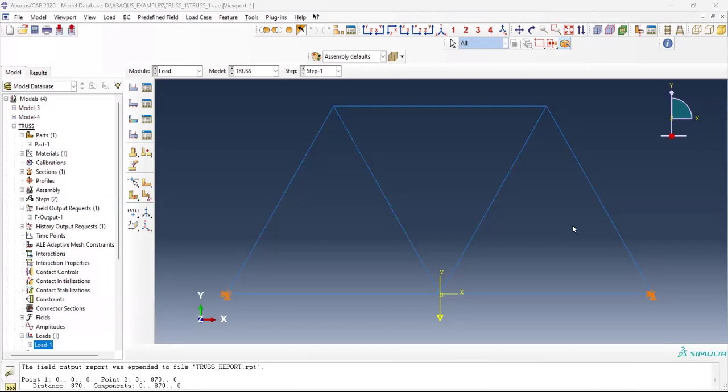So to get this, for this simple stuff, we can use an analytical method to solve. So to do this using Abaqus, first of all, when we open Abaqus, the first thing we need to do is to define

the model. If you come to the model tree, you see here. For example, if this was just a new page, everything is new, you can double click on this one. Now I have 4 models here. Can you see these models? I have model 3, model 4, truss, and truss beam. So for yours, if you've not added any model, you will have only one model. If you don't have anything at all, you begin all over. Then you double click on this one, and you start defining your model.

So you can always give it a name. You can right click on the model, and after you have created a model, you have to give it a name. It will ask you to rename it, but if you don't mind, you can leave it like that. If you don't have many models, you can just leave it model 1, model 2, if you know what it's referring to. But it's always advisable to give it a name that can help you to easily

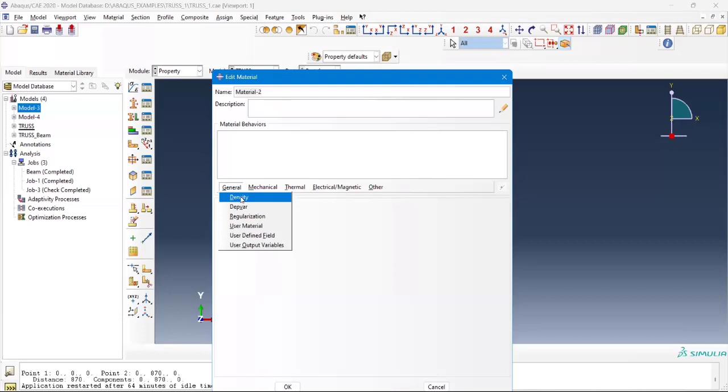For me, most of these materials properties, I've never used them. The density is the key property here, you specify it. Then you come to mechanical, where you are going to specify the mechanical properties like the elastic modulus and other properties.

For now, in the program with the truss that we did, we just used linear elastic material properties. Later on, when we are doing more advanced stuff, we will need the plasticity, the plastic behavior, and we'll have to define it. For the elastic behavior, you only need the Young's modulus and the Poisson's ratio. If I click on it, you see we have Young's modulus and Poisson's ratio for the elastic behavior.

Later on, when you are doing advanced stuff and you need to define the plastic behavior, there are different material models for plasticity, and you have to select one that accurately describes your material, the behavior of whatever material that you are going to model.

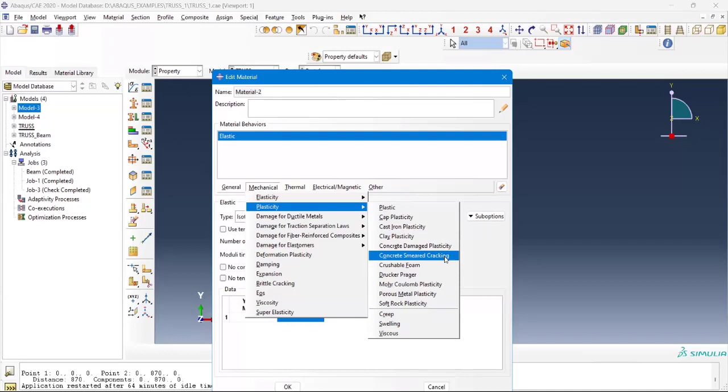So for concrete, for example, mostly we'll be using this concrete damage plasticity model. There are other numerical material models for concrete, but the concrete damage plasticity is very good. We also have the concrete smeared cracking model. I think there are three models for concrete which we can use.

Okay, so this is for the material parameters. You will not define them again, we have done that already. Then after you define your material, you also have to create a section.

You have to create a section. The section is where you are going to specify the type, for example, whether it's a beam, whether it's a solid element, whether you are going to use solid elements or shell. It has to do with the shape of the system or the structural element that you are dealing with.

For example, for one-dimensional structures, like a beam, you can say it's one-dimensional, though it could be 3D, because in one dimension maybe it's much longer in the span than in the width. So we can say that it's one-dimensional, so then we will use a beam.

And then when we come to the type, we can either use the truss or the beam. So the last time we modeled using the truss, today I would do the same thing using the beam, and you are supposed to get the same results. Just that if you use the beam, there are some extra parameters that you have to define.

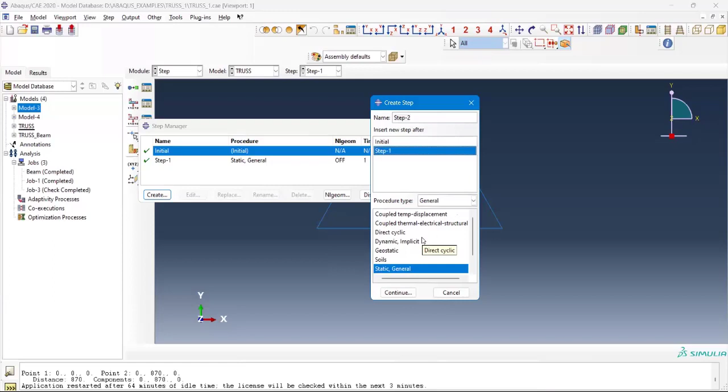So there are ways to do it so that, okay, yeah, I found it. There are ways to define it so that even though you are using the dynamic explicit, it will appear like it's a static problem. So this is where you define the analysis type that you are going to use. You can follow it from there.

Then this interaction is where, if you have different materials or different parts that are touching, or maybe one is embedded in the other, you need to define how they are interacting. For example, if you have steel rebars or reinforcement in concrete, there will be some kind of interaction you need to define. If you have, for example, a steel column resting on a concrete base, there is some interaction between the two parts that you need to define. But for this one, we are not going to use it, though later on we will.

After that, you define your load. How is the load applied in the model? For example, in this truss, we know that the load is applied at the middle node, bottom of the truss. So you apply your load, and then boundary conditions. Last time I think we applied a pin on both sides, but the question actually said one side is a pin, the other side is a roller. So we will go over it again, and when we are modeling using the beam, I will use the right port so that we can see it.

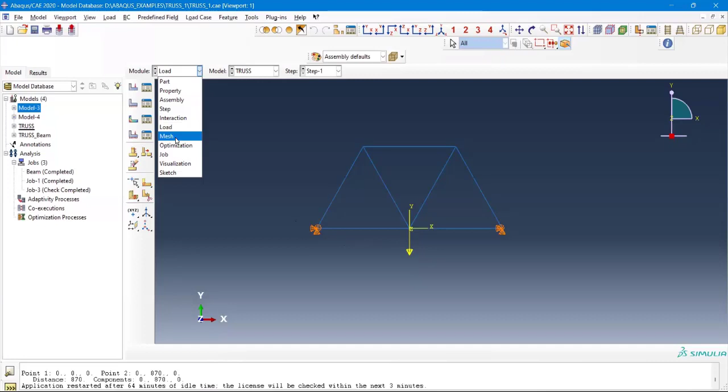Then after you've done this, you have to mesh your model and define the type of elements that you are going to use. If you are modeling this as a truss, when you go to the mesh module, we have element types you have to select. So when I select the mesh module, then I come here, I click on mesh.

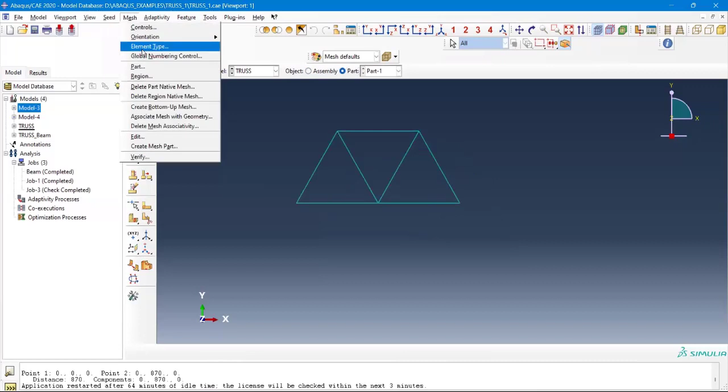You see here we have element types. So I have to put it on part. It says select the model first. Okay, so I've selected. Then when you come to element types, under family, we have different types of elements that you can apply. But you can't just use these elements anyhow. The type of element you use must be consistent with the nature of the problem you are solving.

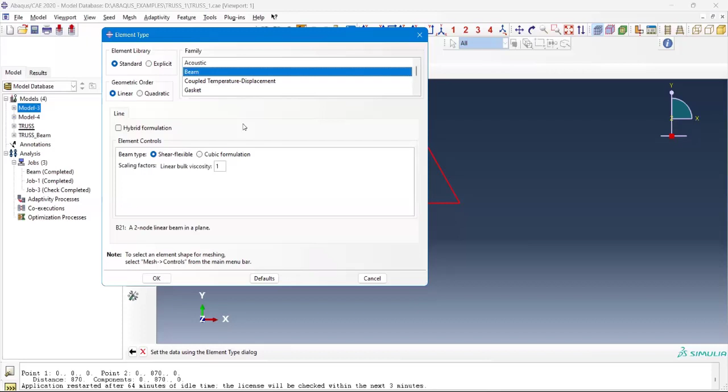For example, we model this as a truss, so when we come to element types under family, we have to select truss. If you select beam, it may not be able to solve because you will need to put in extra parameters which you may not have done. Also, because we modeled it as a one-dimensional element, we are not seeing the 3D elements. There are a lot of other elements not showing. This program is giving us the elements that are consistent with the model we have created. Otherwise, if you model it as 3D, you will see 3D elements and other types.

So for this one, we select the truss, and every element that you select has got a name. When you come here, you see the name is displayed. This abbreviation is saying 2D, T2D2, meaning it's a two-node linear 2D truss element.

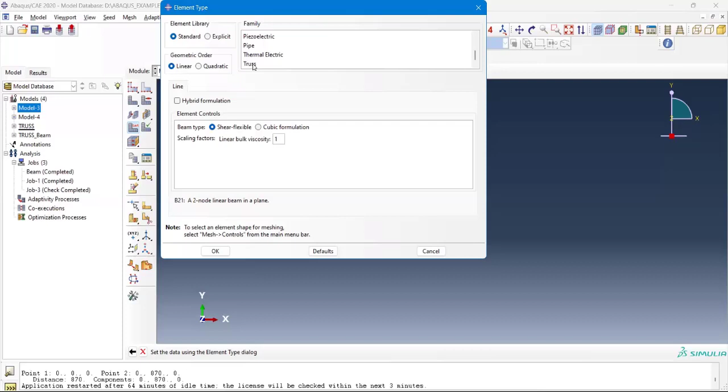So every element that you select, it gives a name. See, when I selected a pipe, can you see that the name has changed here? If you select a beam, it will be the same. So here, this one is B21, just to describe the type of element that you are dealing with.

So that is for that. Then after you've assigned the element, for this one we create a job. The job is for when you have done everything and you are now going to analyze, so you are submitting it for the program to process. You double click on job, then you create a job, and then after that you submit.

But before that, when we are doing the other one, I will take time to explain this. You can check whether you have done everything right, so you do a data check. Just before you submit, check and be sure that everything has been done right, then you can submit.

Okay, so let's go over what we did the last time. Let's look at the results. But before we do that, there is something very important we need to look at, which we did not define. When we come to the model tree, can you see the model tree? We have parts, materials, sections, profiles, assembly, steps. Just after step, can you see field output request?

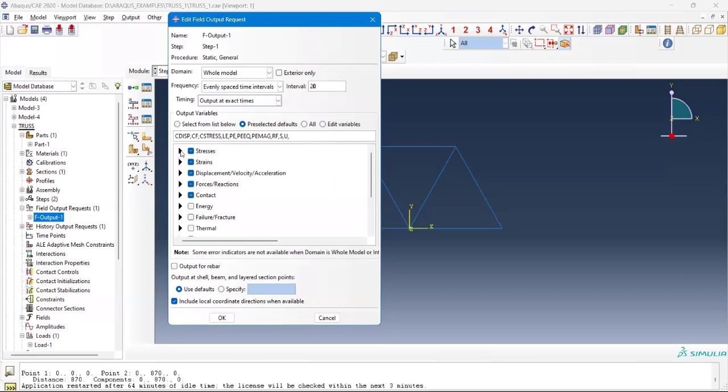Then when you come to the output variables, we have stresses. We are interested in the stresses. If you click on this arrow, it will display the stress fields. We have different stress components. For this one, the first one, stress components and invariants, should be okay. Or the Mises stresses, we can include that one. This should be okay for the stresses.

Then strains also, we want the total strain components. We want the plastic strain? Because we are dealing with linear elastic behavior, we don't need plastic strain, so we can deselect it. The PEEQ, equivalent plastic strain, we don't need that, we can deselect it. If you don't need any of these and they are selected, you are going to have larger output values, which for nonlinear problems can delay the analysis. So you can deselect the ones that you don't need.

And then this one, logarithmic strain components, is mostly necessary, so you can leave that one there. Then you come to the displacement and velocities, and we want the nodal displacement. For example, where we apply the load, that section is going to move downwards, so we need the displacement. So this one, it's okay.

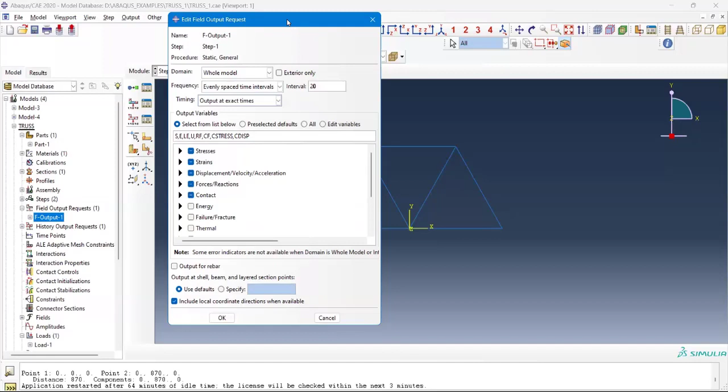Then when we come to contact, you see here, by default, contact has been selected. But in this problem, we don't have any contact, so we don't need it. Of course, this problem is very simple, so in a few minutes it will be solved and you get the results, even with the contacts. And since there is no contact, it's not going to give you any values for contacts.

You can look at other field outputs. Now, when it comes to failure, this one is going to be important when we are dealing with, for example, 3D members.

So we need the damage in compression of the material, how it is damaged. Is it compressive damage, tensile damage? We use it to interpret the behavior of the material. There are different ones; for example, this scalar stiffness SDEG is also important, so you select them. For example, this damage initiation criteria is also important, but it depends on the work that you are doing. So all these are field variables that you can select. Those that you don't need, for now we don't need this failure, so you leave it out.

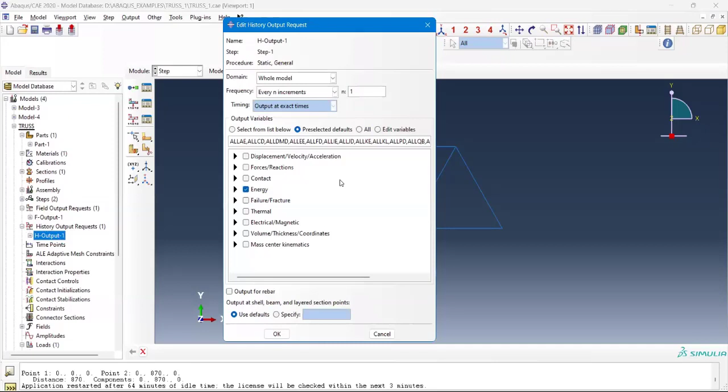Then we also have history output request. So you double click on the history output request. The history output request, for example, for this problem, we want to find the displacement at this node, the middle node. If you want to see how the displacement is changing with time, or as the load is applied, how this node is being displaced, we can define it so that it just keeps track of how this node is being displaced.

Of course, if you don't define it, you can still get it from the field output request. But sometimes it's better if you use the history output. It gives you the history of the displacement at this node. So let's go back to that. Under the history output request, depending on what you are interested in, if you want to see, for example, how the support reaction is changing, you can define it from here. You can define so many things from here.

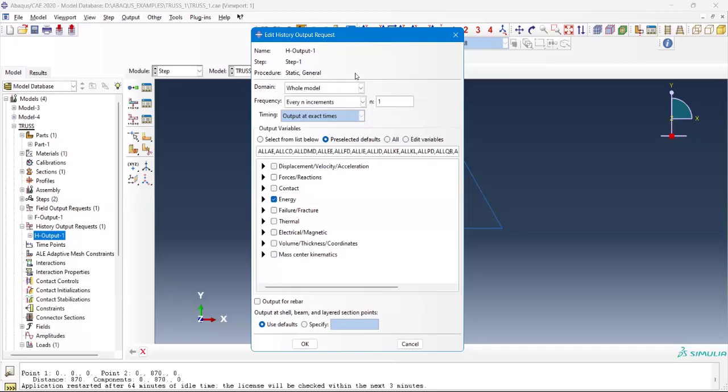But here, this energy is very important when you are checking, for example, whether there are dynamic effects in your analysis results or not. But now we are not going to use it, so let's leave it like this. Later on, I will show you how to use it. So this is for the history output request. You define it just like the field output request.

Okay, so now let's come to how we analyze the results that we have obtained. That is what is most important. For example, you want to write a report. When I give you an exercise, I don't expect you to send me the Abaqus file that you created. I won't be able to run every one of them. What I need is a report. You have your results, you have copied these results to either Excel or maybe Word, then you send me.

So you show me your support reactions, the displacement at the specified node, and the stresses in the members. You just export this to Word and send me. I just need a Word file that is your report. I don't need the Abaqus file. So you must know how to get these results and how to use them if you are writing a report or whatever you are doing. So let's see how we do that.

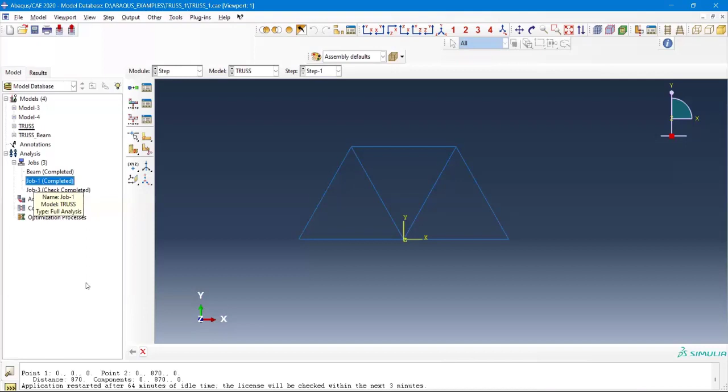Okay. So let's go back. We created a job. If you want to see your results, you right click on the job, the name of the job. Here I gave it Job-1. So I right click on this and I go to Results. If the analysis was completed, it will show me the results. So here I need to analyze these results.

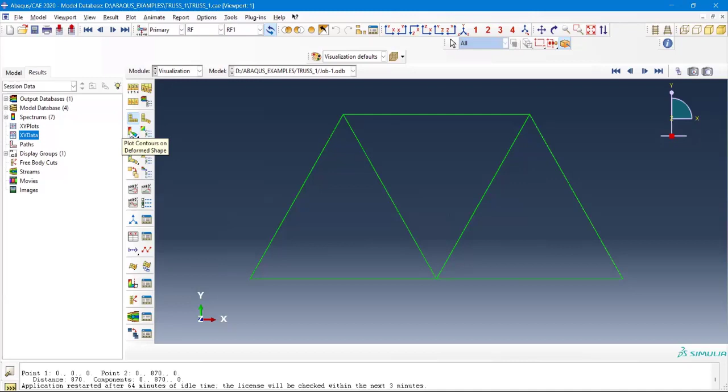Okay, so this is what you will see when you come to the results. The model will be in green. In this way, you are not seeing anything; it's just what you modeled. If you want to see the stresses, the strains, the reactions, and all that, you click on this rainbow icon, which says plot contours on deformed shape. When you click on this, can you all see the deformed truss?

Yes, please. Hello. Yes. Yeah.

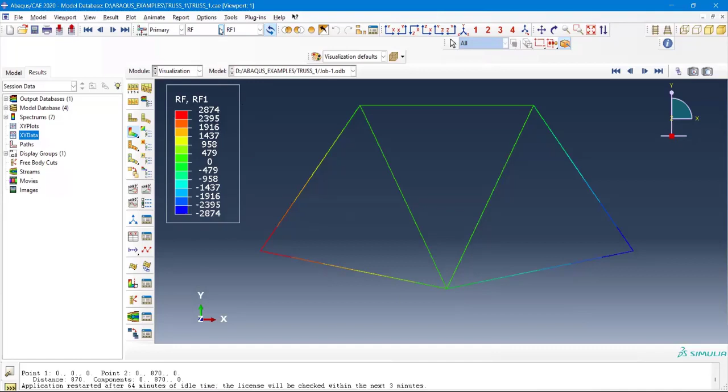So let's come to this legend. Can we see this legend? Okay, so yes, let me go to stresses. Okay. So when we go to this legend, there are different, let me use the principal stresses. So here, this is normally what you get from your analysis. This is telling us the stress distribution in our

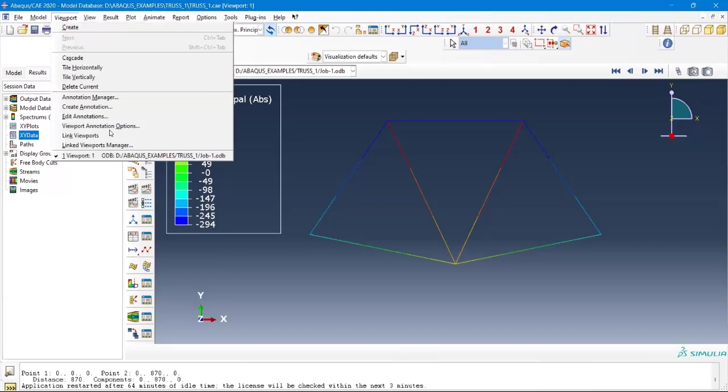model. So if you look at this topmost part where we have this deep red, it's saying that the stress value is 294. For some of you, you may not be seeing this. It may be showing in standard form. Let me see. So come to Viewport and Viewport Annotation Options. So here you will see General.

You will see other stuff I have disabled. So if you go to apply, this is what you see when you open initially. You have these writings here showing you the name of the model and the analysis step that you defined. So mostly if you are writing this to an output file, or you want to export this to, let's say, Word, you don't need this.

You don't need this. So you go to Viewport, then Viewport Annotation Options. So here under General, you see we have state block, title block, show state block. You can disable them and say apply, because you don't need to show this. Then we come to the legend. The legend is this box here where I have my S max principal.

So normally the default way is the scientific notation. Sometimes you see this, but I prefer to use fixed so that it gives me the absolute values, the actual values. So it depends on you. You can use scientific, you can use engineering, but for me, I prefer this one. So I go to apply.

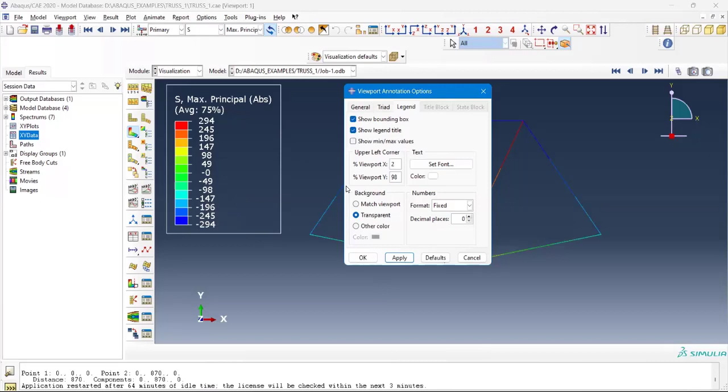Then this box that is showing here, you can keep it, but sometimes you are showing it in your report or your thesis or your paper, and you need some space. If you want to let this model come closer to the legend, you don't want this box to be interfering. So you can just disable it. Under Legend, you see Show bounding box. If you deselect it and say apply, it will just leave, so that you can have your model closer to the legend. So I have disabled that.

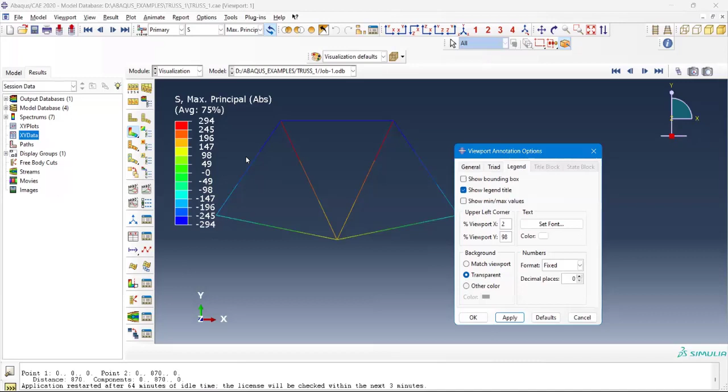Okay. And also this legend, you can reposition it using this X and Y, this percentage viewport in X and then Y, if you change these values to wherever you want. Okay, so we go to OK. So as I was saying, now let's come to the interpretation of our results. So this is for the maximum principal stress, where we have these members shown in red.

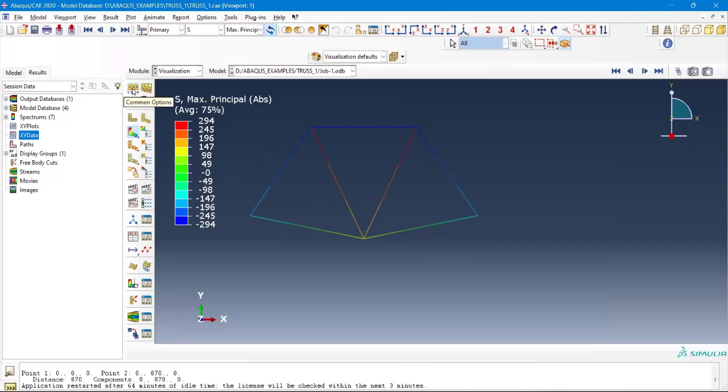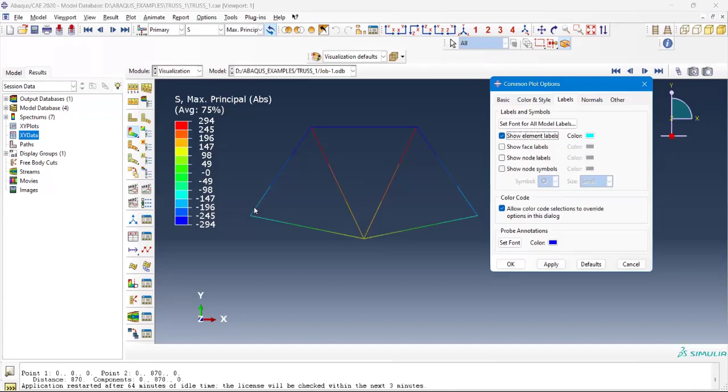Okay, first of all, let me show which elements and nodes we are talking about. Can you see this first icon with these numbers 1, 2, 3? When you click on this, it says Common Plot Options. You go to Labels. So you can show element labels. For this one, each member is an element. We didn't use so many elements, because this is very simple.

But for example, if this member here has maybe 10 elements, then if you say show element labels, it will give each of these 10 elements a number. But here we have just one element for each member. So if we say show element labels and apply, you see that these elements have got numbers displayed: element 3, 4, 5, 6, 7. Then we can also show the node labels. So we click on node labels.

If you want to change the color, you can do so.

Hello? Yeah. You want to ask a question?

No. Okay. So we can also show the node labels by selecting the node. Then okay, apply. So you see that the nodes have also been given labels. Then we can close it. So now you have this well labeled. We have the node labels and we have the element labels. Let me see if I can... labels. Yeah, show node symbol. Okay.

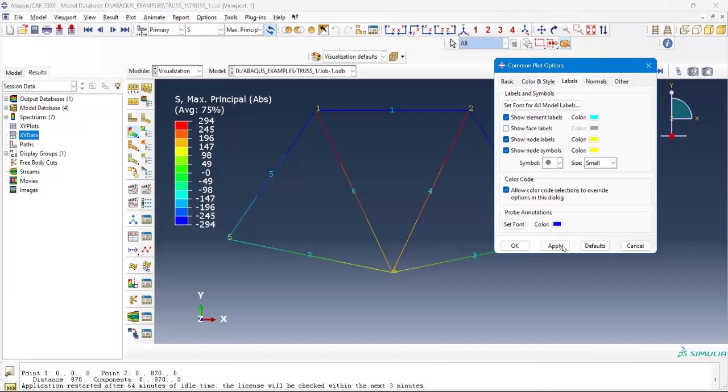So can you see that now the node symbols have been added as some kind of points? Okay. So now we have our results. Let's see how we interpret this.

So what you want to do, first of all, for example, if you are analyzing a member to see whether the structure is going to fail or not, you can compare this maximum principal stress to, for example, the ultimate stress or ultimate strength of the material. So this is where the finite element method is very useful.

First of all, for example, before you even go and do any experiment, you want to see whether the load that you are applying to this truss is okay or not. You want to then see whether the stresses are above a certain limit or not. So now we have the maximum being 294 MPa.

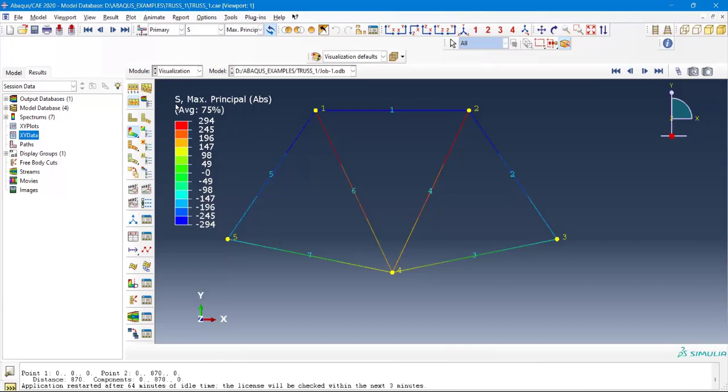So this is the maximum principal stress in tension. It is 294. The red parts are in tension. And I think we can also show the arrows. Let me see where we can show the arrows to see where we have tension and compression. The basic plot option, render. Just a minute, I want to check something.

Okay, so can you see these arrows displayed on the members? Yes. Red arrows. We can see that members 6 and 4 are in tension.

Hello? Yes. Yes, sir. Okay, so you can see my screen now. Yes.

Okay, so let's say that after you have shown the nodes, the members that are in tension and in compression, you want to get this to maybe put in your report. So you don't have to use screen capture.

Hello? Yes. Can you still hear me? Yes. Okay.

If you want to get this, you go to file, then you go to print. If you use screen capture, for example, I have screen capture here, if I want to snip this, it will show this background, which is not nice, unless maybe your background is plain white, then it could be okay. But for me, I don't like this. So I go to file and you say print.

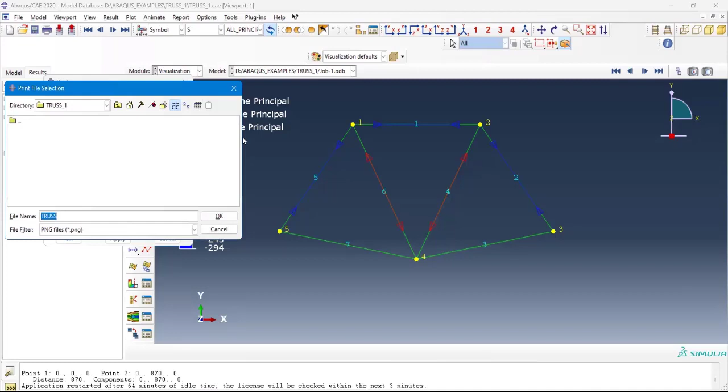Then here under printer, you select file. For format, you can use PNG. It will come as a picture. So PNG, normally this is what I use, and it comes as a picture. Then you give it a file name. So let's say truss, and the destination for this file, you indicate it.

So in my case, in this folder that I created for the output results, I'll just say results. Create a folder within this. So I select it and I go to, okay. So this is written to an output file. Let me go and see.

But are you following as I'm doing it, or you are just watching? If we are following,

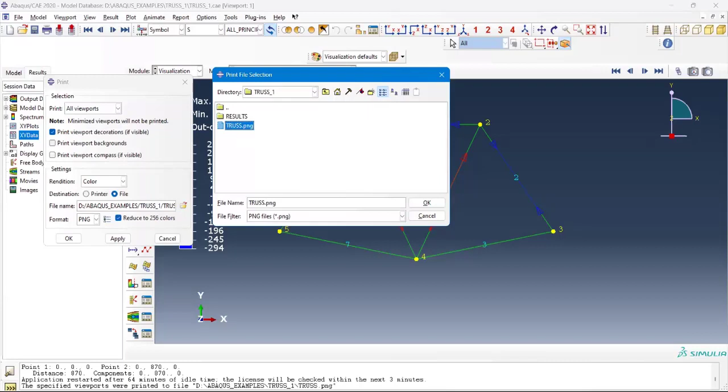Oh, okay. I did not write to this output file. Let me do it again. So file, print. Okay, now I've seen why.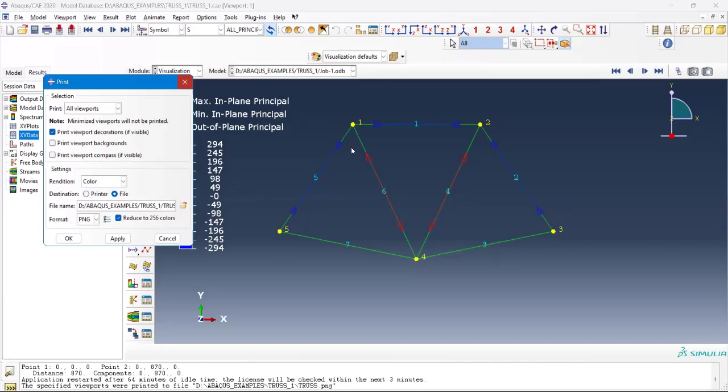So it has been written to the folder that I indicated, but I don't want to change the screen. I can send it to Mr. Japan for him to send it to your group. But I don't want to change the screen, so let's keep on. It has already been written with a white background, which is nicer than if you just do screen capture. So that's how you copy whatever you want to copy to, for example, Word.

You just go through this procedure. For example, after you have modeled your part and you've assembled, if you want to get a picture of that, don't use screen capture, just go through the same procedure to get it. So first of all, you want to show the model with the nodes and the element labels with your stress distribution. So this is for the stress distribution.

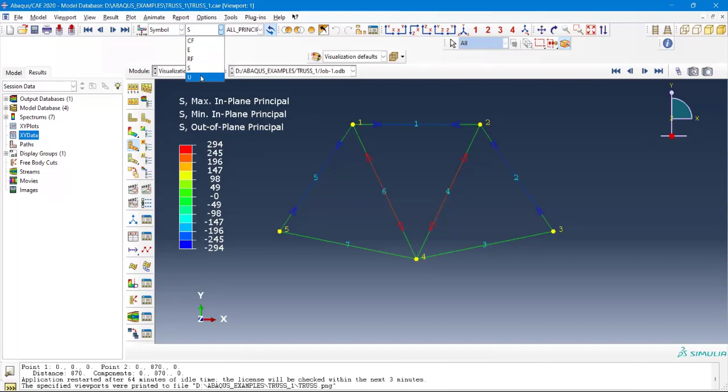You can also show, for example, the displacement. For the displacement, we use U. So we go to U for the displacement. Then here, this resultant is for the total. For example, we are interested in the vertical displacement, so U2, or you can also show U1. Okay, let's start with U1. U1 is for the horizontal displacement. So if we click on that one, you see this shows how the nodes are displaced.

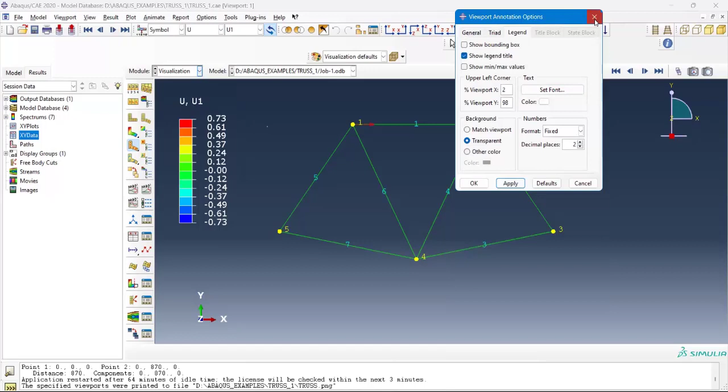So the maximum horizontal displacement is just 1. Maybe it's 1 point something, but because of this result, the number of decimal places I'm showing is just 0. So let me change that, maybe we can see. So, okay, you see this one is more accurate. To 2 decimal places, this is giving me the exact horizontal displacement.

Now, if you want to know which node has this maximum horizontal displacement, you can also indicate it, even though it's showing here, I think, node 1. So where we have this rainbow color, if you click on this one, it gives you the contour plot options. Under the limit tab, you have maximum, auto compute, and then we have show location. If you select this one and go to apply, it will give you the node that has this maximum displacement.

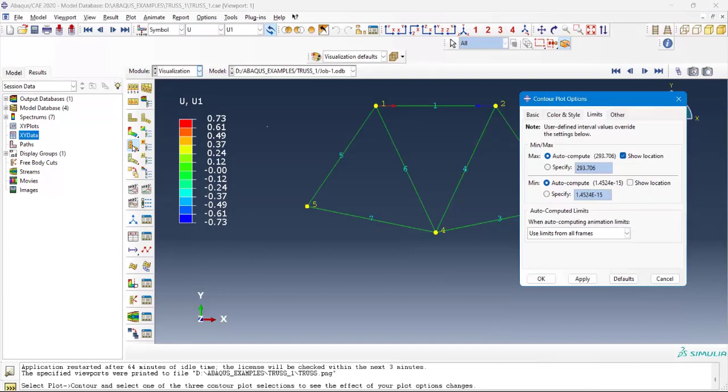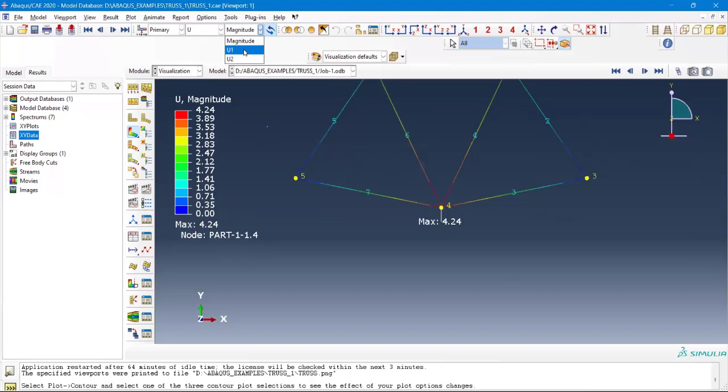I think the field output is not, this is for stresses. Let me see if I can. Minimum, maximum. Or is it because the arrows are already? Okay, now let me see if I use the. Okay, so this is for the maximum. Can you see now?

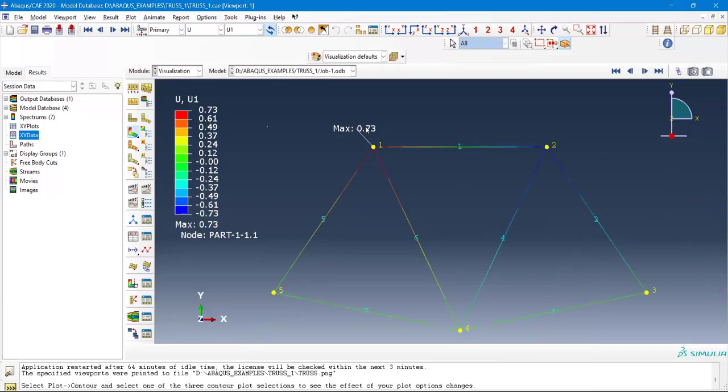Yes, it shows that node 1 has got the maximum horizontal displacement. This line here says the maximum is 0.73. Node 1 has the maximum. This is how you can show where the maximum stress or the maximum displacement is occurring. So this is for the horizontal displacement; node 1 has the maximum horizontal displacement.

We can look at the vertical displacement. And so, what is this? Okay. So here, we want the absolute value. The vertical displacement maximum is -4, but because I have indicated that it should give us the maximum, it's saying that 0 is larger than -4. So it's saying the maximum displacement is 0.0, but that's not what you're interested in. You want the absolute value.

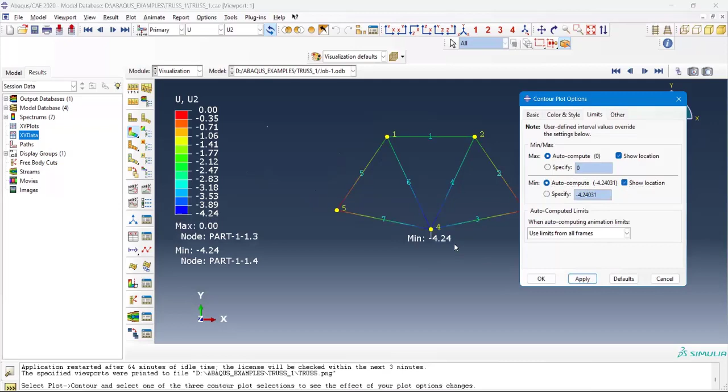So we can go back, or you can indicate the minimum, even though the minimum in this case would be our maximum displacement. So if I say apply, it will say node 4. Oh, sorry, I want to show it rather. So node 4 is giving us the minimum, but this is the maximum displacement I'm interested in. So this is how you can find out which element has the maximum stress and which node has the maximum displacement.

And the stresses can also be shown. So you come here, S for stresses. For this one, the stresses are shown with respect to the element. Okay. Then reactions, we can see the reactions at the nodes. They are there. So the maximum reaction is about 5.7.

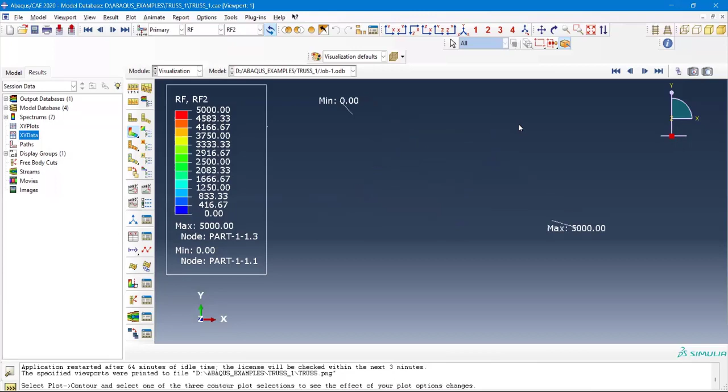Okay, let me see the vertical reaction. We are interested in the vertical reaction. So RF2 is about 5,000. So it's 5 kilonewtons. And if you do the analytical calculations, that's exactly what you get. It's exact. That's why I said that for simple problems like this, the analytical and numerical solutions will almost be the same.

So now we want to get this as a report or an output file. So what we are going to do is, first of all, you go to report. You see, we have report.

Under report, we have XY, we have field output, and then we have free body cut. We are interested in the field output result.

So you click on the field output result, and you are writing this as a report. So we have these variables. First of all, if you are interested in the stresses, you use integration point. I will explain this later when we are dealing with 3D elements, this one will be difficult to explain the integration point.

If you are interested in the stresses, this question said we should get the stresses in the members. So to get the stresses, you select position, you select integration point.

This setup, you can give it a name, the name of the report. This is going to be written as a text file that you can use. You can use Notepad++. Do you have that?

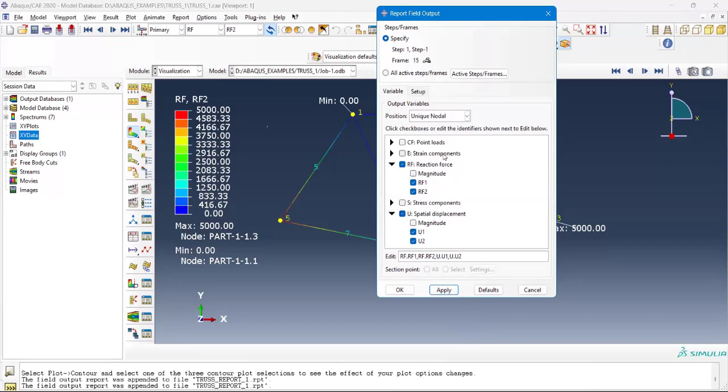Then I go to apply. So this is also written to the output file. Now, when I finish, if you click OK, it will write this again because you selected them. So rather, I'll cancel. Then I go to this output file.

Where do I have that one? So if I come to output file, I can see the truss report 1. The file extension is .rpt. So I will open it.

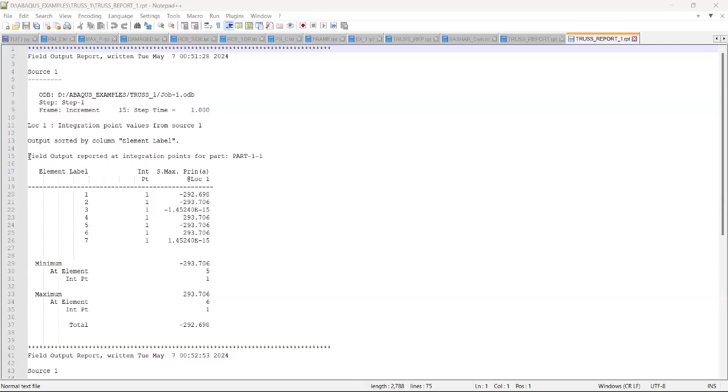Yes. Okay, so when you come to the file, we have some initial statements, but I'm interested from here, this field output reported at integration point. So this is going to give me the stresses.

So we have the element label. We have element 1, element 2, up to 7. And then here, integration point. INTPT is integration point. I'll explain this integration point when we are dealing with 3D elements.

So this is the maximum principal stress values. So for element 1, the maximum stress is 292 MPa, point something MPa. So these are the stress values at the various elements. So you can see which element has the highest stress and which one has the lowest.

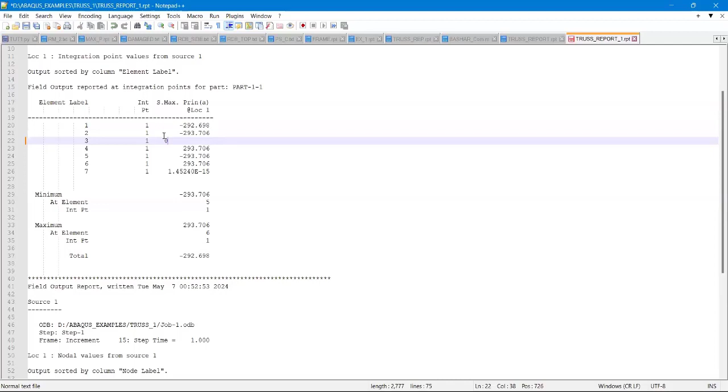So for example, if you modeled this, you want to maybe analyze a roof truss, and you want to see where you are going to have the maximum stresses, which member is going to be most stressed. So you model it in Abaqus like this, and you can see the stress distribution in the members. So if there's a particular member that has the stress exceeding your allowable stress, then you need to do something, whether you change the size or you reduce the load, whatever you want to do to make sure that this member does not fail.

So this will help you to see which of the members needs attention. So if you come below, it tells you the minimum stress and the maximum stress. This minimum and maximum, they are just using the sign. So the negative value here is saying that is the minimum stress, that means this is compression. This member is in compression, and the maximum element, the maximum stress, this member is in tension. So if you are just looking at the absolute values, then that will be okay.

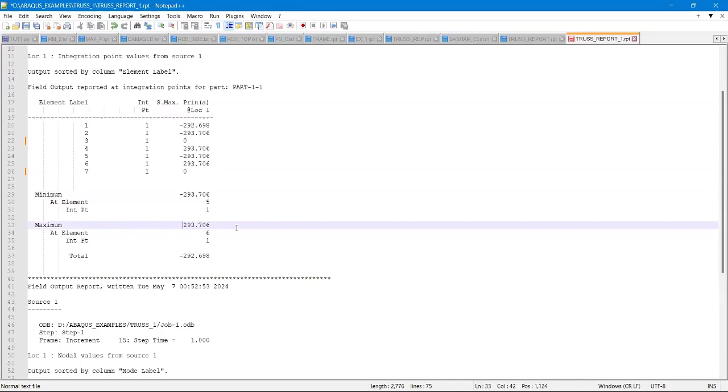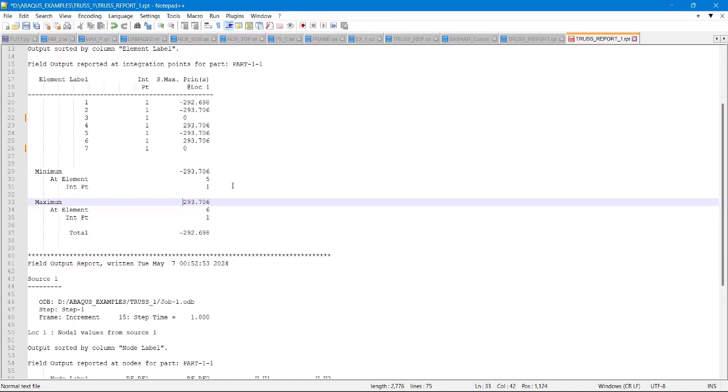So that is for the stresses. So if you have a very large truss where you have so many members, then this can help you to see at a glance which of the members has a higher stress, which one has a lower stress. All right, then we go to the...

Nodal displacement and reactions. So here we come to field output report at nodes. Okay, so this first table is for the displacements that were not written. Oh okay, they are written here. So this table here, we have the first column giving us the node numbers, node labels, node 1, node 2, node 3, up to 5. Then the second column is giving us the horizontal reaction. So you can go to the nodes and check whether these are true. So node 1, for example, has no horizontal reaction.

Node 2, the same. Node 3, I cannot see it, okay, I can see it, but you cannot see that. So node 1 is just up there. So it doesn't have any horizontal reaction. The same with node 2. So the reactions will actually be at the support.

And our support from the model, the support nodes are node 3 and node 5. Let's see, you see here we have node 3. We have got some values here for the horizontal reaction. Node 3, this is node 3, and node 5. They are almost the same values.

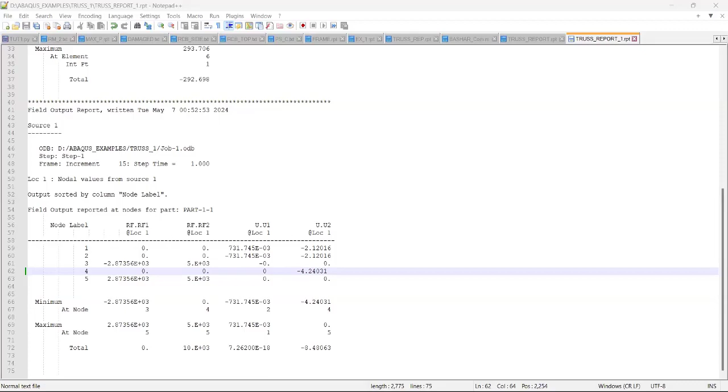Okay, then let me share my screen again. Okay, so in general, any question regarding this truss? Because I'll give you an exercise. So I think this would be for line elements.

The next time when we meet, we will deal with 3D modeling. We will model a beam, and this is where it is much more interesting as far as solid mechanics is concerned, that's where the real work is. So, it's good if you understand this basic stuff.

All right, so you don't have any question or contribution? Yes, Doc. Mr. Ajapon and Kofi Sapon, do you have any contributions?

Doc, I think we should go and practice what we asked today so that when we meet again, questions we can ask.

Oh, okay, all right. So let me see if I've covered everything that I intended to. Yeah, I think so. Okay, so you can practice this one.

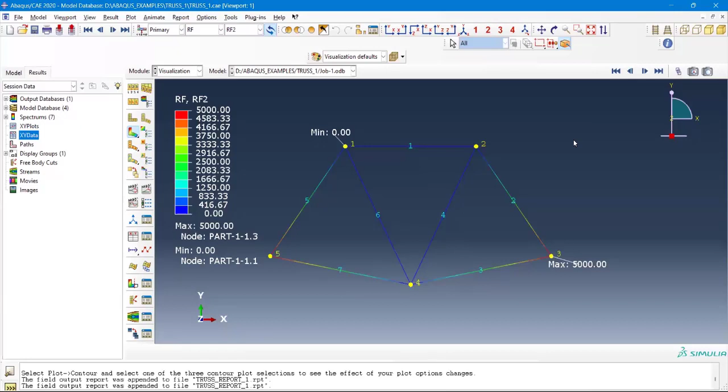All right, is it possible to get the link early so that we can try on our own? Which one, of what, over today? I mean the recorded video. The recorded video for today.

Now I'm not seeing that it's being recorded, from before I went off. It's recorded. Sorry? I think it's recorded. We are recording, it's still being recorded. Is it still being recorded? Yes, yes, Doc.